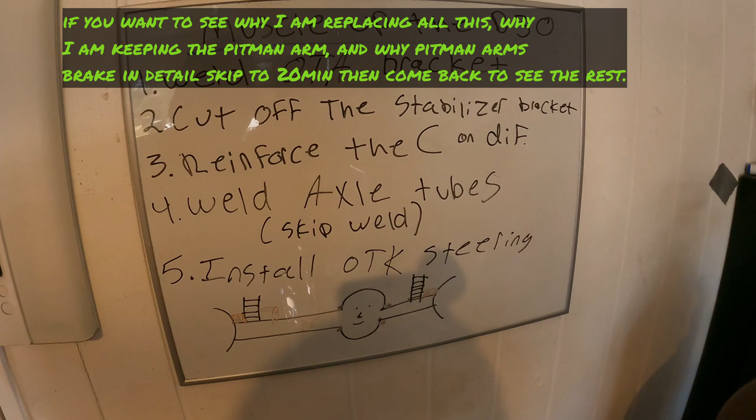So we are back after trail. We're back at the garage. So today is the day we're gonna do upgrades. We found out weak is our steering. So we're gonna call this, let me show you guys, we're gonna call this Muscle Up the Dana 30. So we're gonna be doing quite a bit to the front end, the steering and the diff.

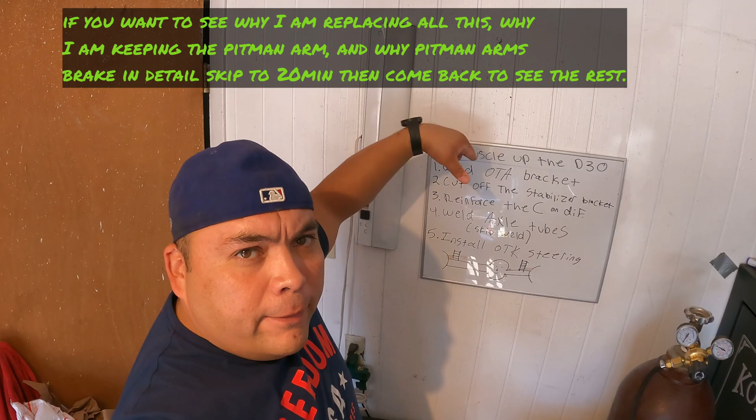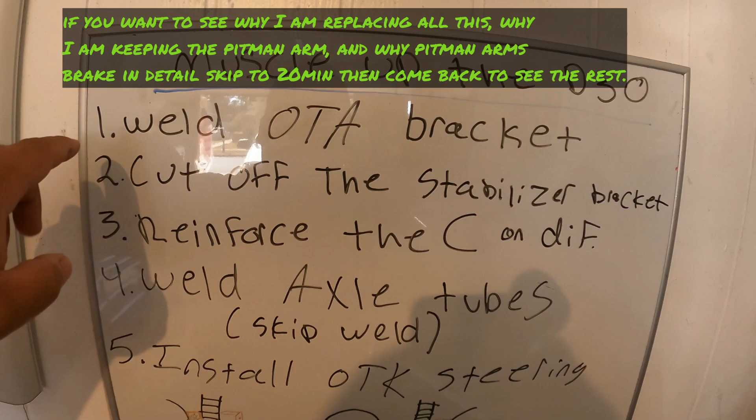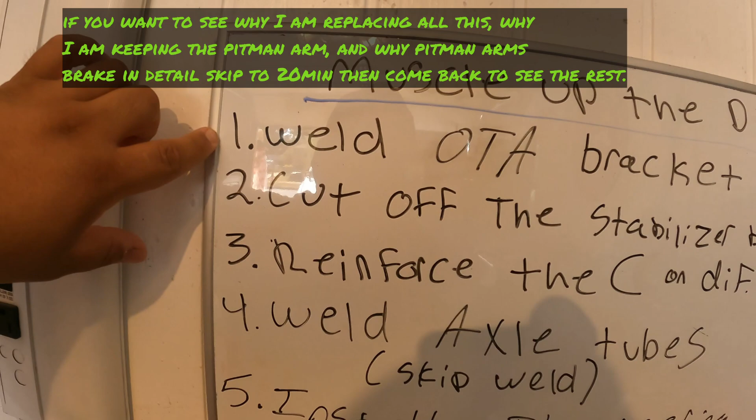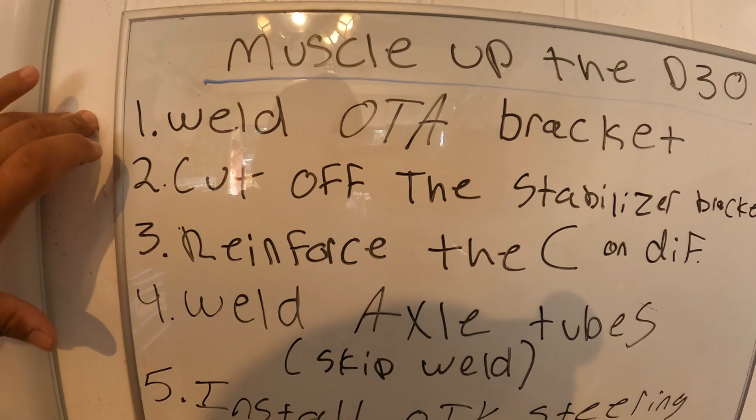So let's explain right here on my little board, my little checklist of what's gonna happen, and that way I could explain it a little better, so you guys could see. All right, so first things first, I'm gonna strip the whole steering, the whole front end of it, and we're gonna weld the over the axle bracket for our track bar. So we got that one's in. We're gonna cut off the steering stabilizer bracket because we're gonna relocate that or take it off, so probably relocate it, but you guys will see everything.

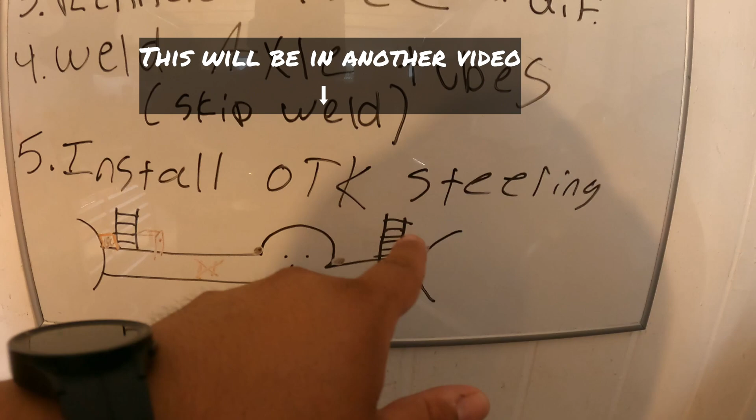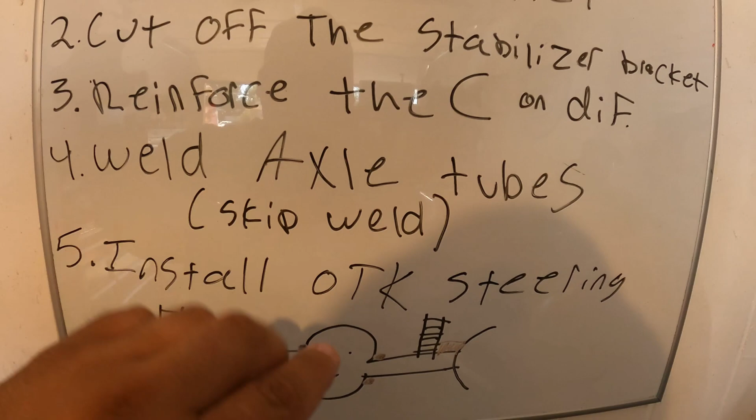We're gonna reinforce the C's on the diff, which, look at my picture, you like my differential picture? Which is this, I'll show you right now. And then we're also gonna weld the axle tubes to the carrier, or the cast. And I'm gonna preheat that. I'm gonna show you guys how I'm gonna do it.

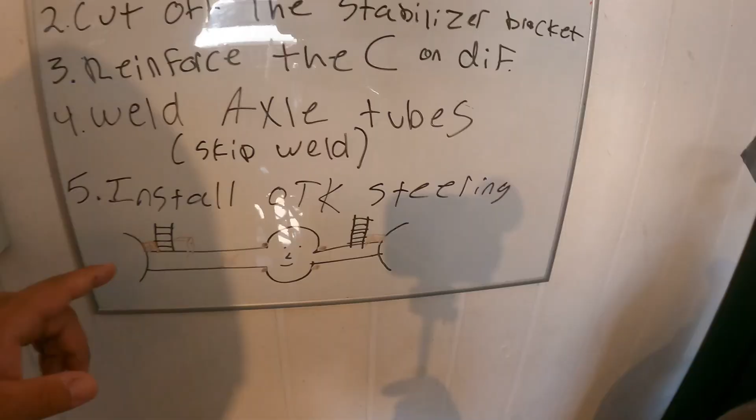I mean, remember, I'm not an expert. I'm just the guy that knows a little bit about a lot of things, not everything about one thing. So I'm gonna show you guys how I'm gonna weld it. Hopefully it should work. I've welded this type of material before. So we're gonna hit it. We're gonna weld it hot. We're gonna hit it good. And then we're gonna install the over the knuckle steering. The whole kit. I got the whole kit. So we're gonna be doing that, because you guys saw it, it broke.

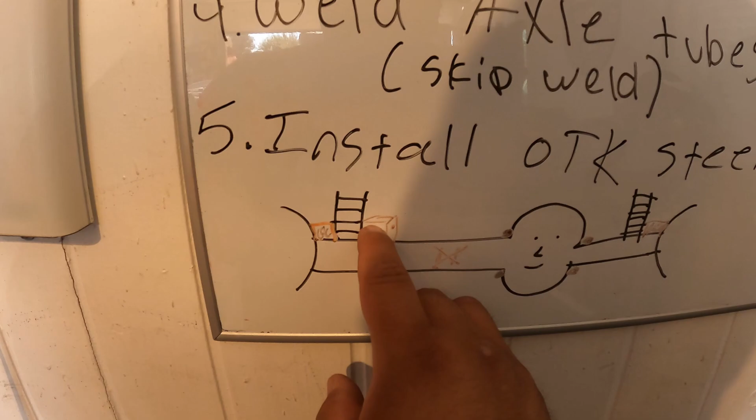Of course, we're gonna weld our new track bar bracket right here, which, check it out, I did pick it up from Trail Forge. This one's it. I got the 6-inch plus one for a 6-inch lift or more.

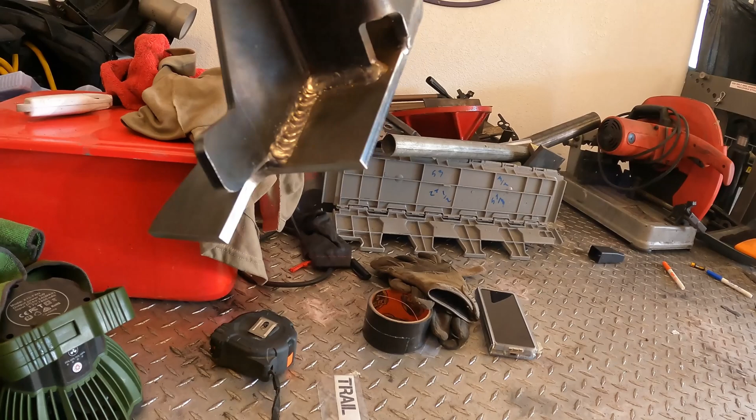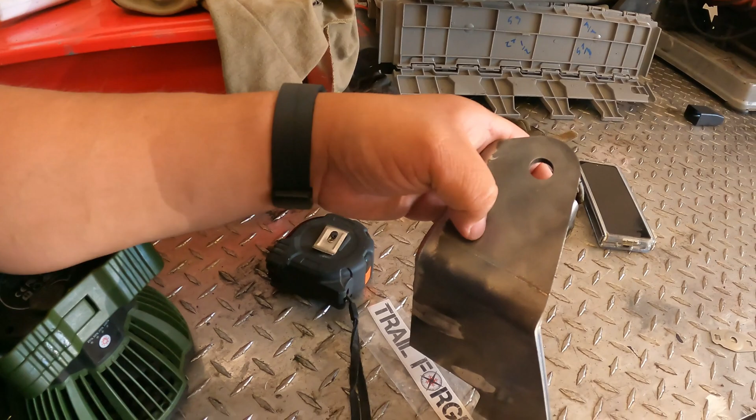So we're gonna weld this one, I'm gonna weld it super strong, because eventually, this is for another video, I'm thinking I'm gonna put some hydro assist on it. I already have it in my head. I already know where to get all the parts, and I'm gonna hopefully do it for a really low cost. But that's for another video. So this, I'm gonna have to weld it super strong. And I'll show you guys my welds.

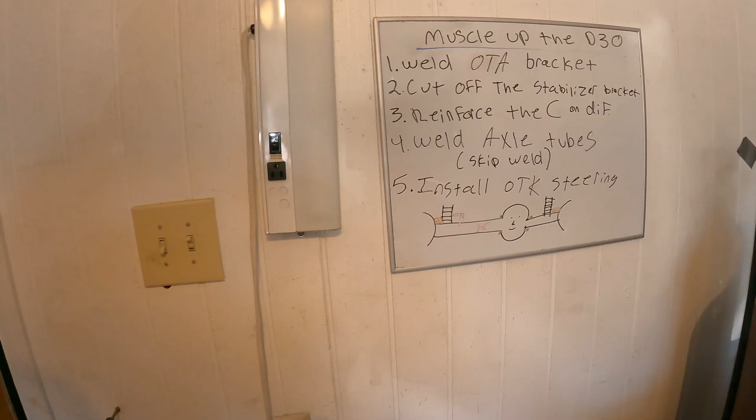So yeah, I like this bracket. They welded it pretty good. It comes pretty good from Trail Forge. So we're gonna be welding that today. So yeah, guys, this is our plan. So first things first, let me get this thing up in the air, start stripping the front end.

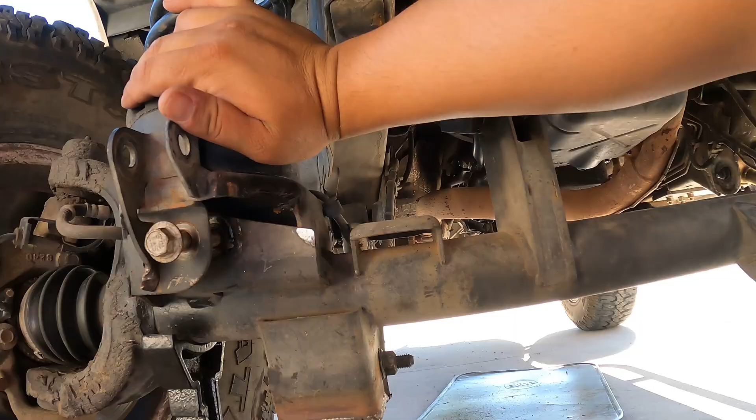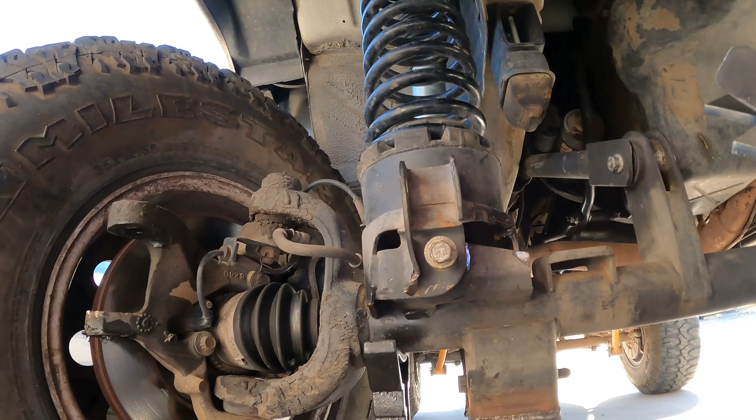A lot of people take the spring off before putting this bracket on, but what I'm gonna do, because this is what you want, I mean, it's really good fitment, but it needs a little bit better fitment, but it's all right, not a big issue. The only thing I'm gonna have to trim a little is this right here. Not a big issue. I like the bracket, not perfect, but close enough.

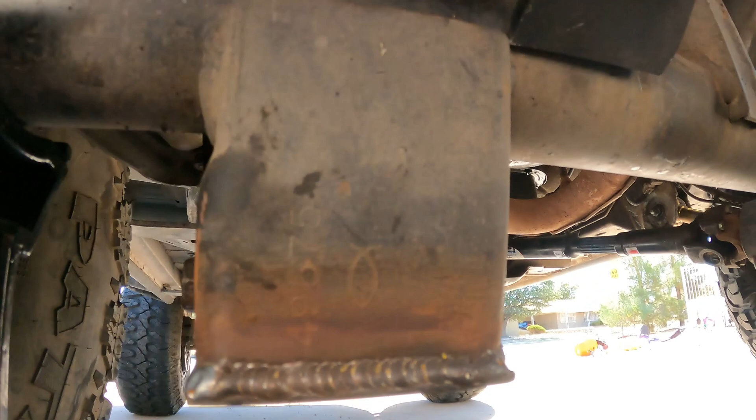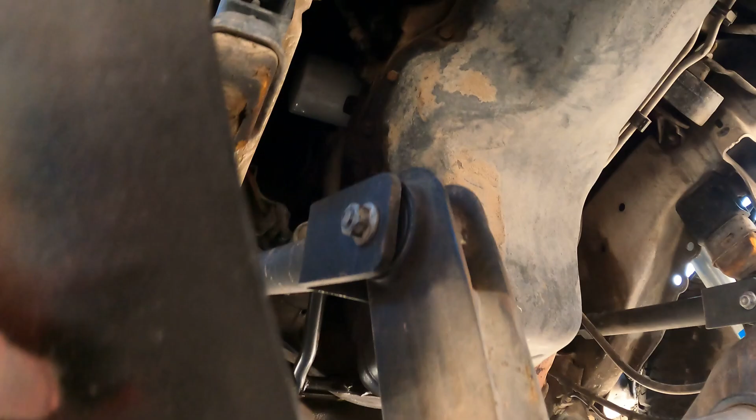Reason why I'm gonna do that, because what I've seen people, they leave a little gap between, because I could weld it right there, no problem, right? But there's a little bit of gaps, and when you're gonna weld something that you're gonna depend on a lot, you don't want gaps. You want it as close to perfect as possible, because check that out. So there's that gap there, right? And of course, I could just bolt it like that, close the gap up, and done.

I already checked if I could open or close that. No, that's not the issue. I could do it like that, but I leave gaps. Let me show. I don't know if you could see, there's gaps between metal and metal. You don't want gaps. You want it at least touching. See? And look, see up here, the bracket up here where my pinky's at.

I want that touching. I could fill it, but I don't want to. You want to get it as close to the metal as possible, because I'm gonna bevel this a little bit, that way I could really get some hardcore badass welds on it. But see over here, it's touching, right? So I got gaps. So I want to get it touching up there, where my pinky's at, and right here. But it's not touching over here, and I'm gonna weld it over here too.

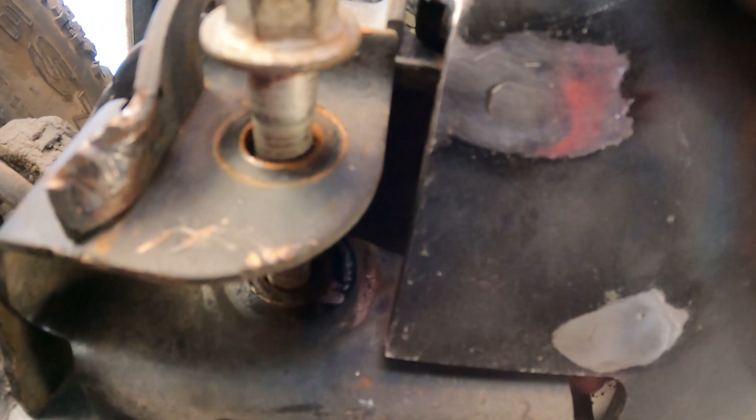So the reason it's not, it's an easy fix. It's right here. That's the issue. So I'm gonna grind that off a little bit, and then I'll bring you guys back once I got the final fix.

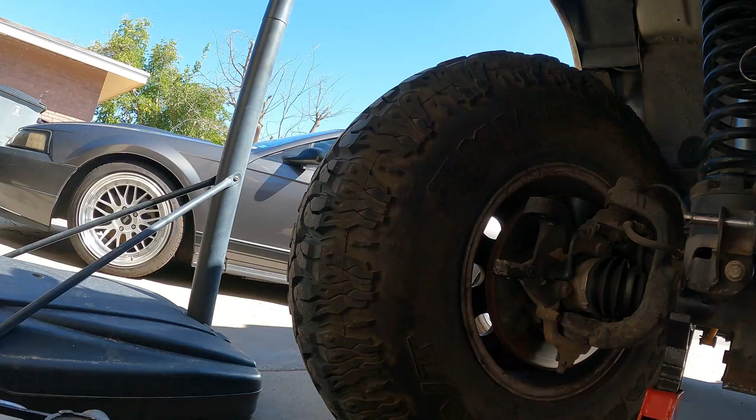All right, guys. So I got it fitted. I'm gonna take it off right now and show you what I grinded. But man, did I get it right on the money? Right on the money. No gaps. I'm gonna weld all this. No gaps down here. Check it out. Hopefully you guys can see it's touching the metal.

So we're gonna bevel this a tad, bevel this, and then we're gonna hit it. We're gonna weld it over here too. No gaps on that one. It's touching the spring, I think it's called perch. Yeah, sure, whatever, we'll call it that. So it's touching that, so that's gonna be welded all the way around. So yeah, guys, it was just very little that I had to grind.

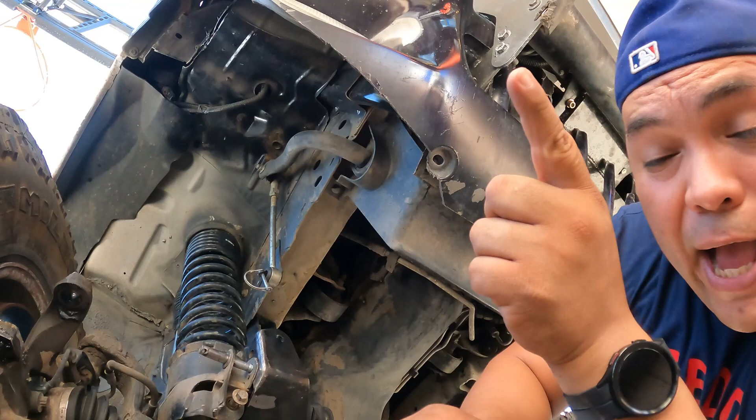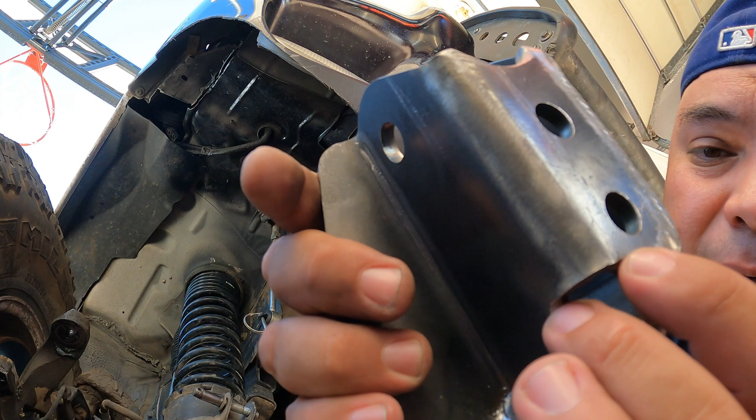Let me put the camera down so I can show you guys right quick. And it went on good. Check it out. They did an awesome job building it. But right there, you guys could see right there. Just put the grinding wheel right in there. Grinded a very little bit off of it. But man, the fitment is next to perfect. I love it. I love the way it's gonna fit.

Now fitment is key when you're welding. Fitment is key. If you don't got a good fitter, you're gonna have a hard time. But yeah, guys, so now I'm gonna just mark it with the marker, every spot I'm gonna hit with the weld, and clean it up. Bring you guys back out as soon as I tack it.

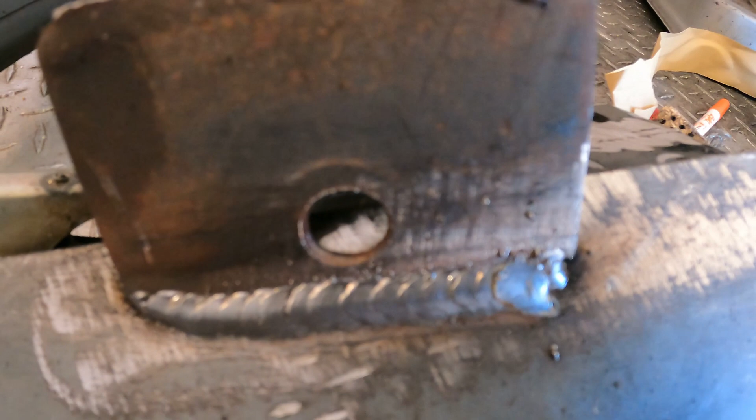All right guys, so we're ready to tack. I already prepped it. Prep work is key work. And I already changed my wire. Already threw a little practice bead. Check it out. Not too bad. Remember, always throw a practice bead, even if you're a pro, which I'm not. But look at that. Hopefully I could do the same thing over there.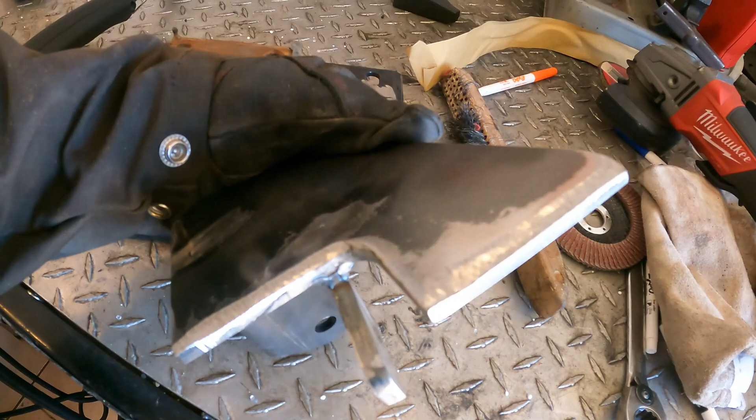So I already prepped this one as well, beveled it, prepped it all the way. So threw my practice bead. Time to super glue it to the Jeep. All right, guys, I got it tacked in. Those are just tacks. Tack there, tack there, tack there, tack back there, tack everywhere. So I like the fitment. Beautiful. Time to hit it.

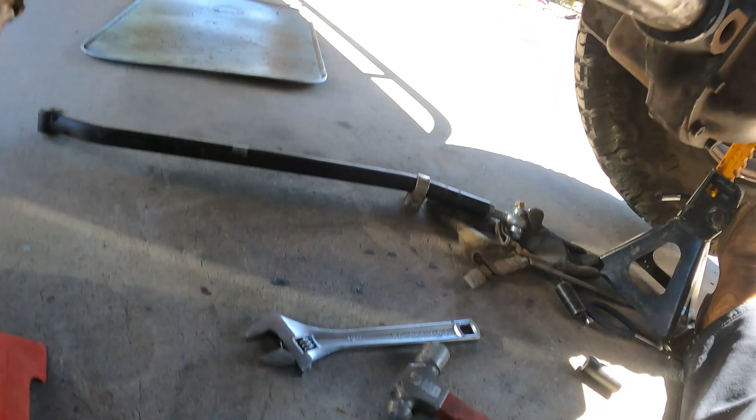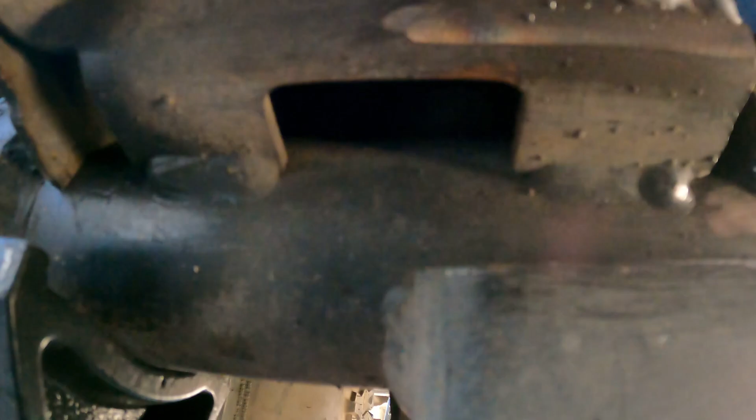All right, guys, check it out. All done. Check out the weld. Not to toot my own horn. All the way around here, guys. There. All the way in the bottom. Hidden in there. All the way around there, guys. So, oh, I'm gonna tack it right at the bottom. So yeah, guys, this thing ain't going anywhere. This thing is solidly mounted.

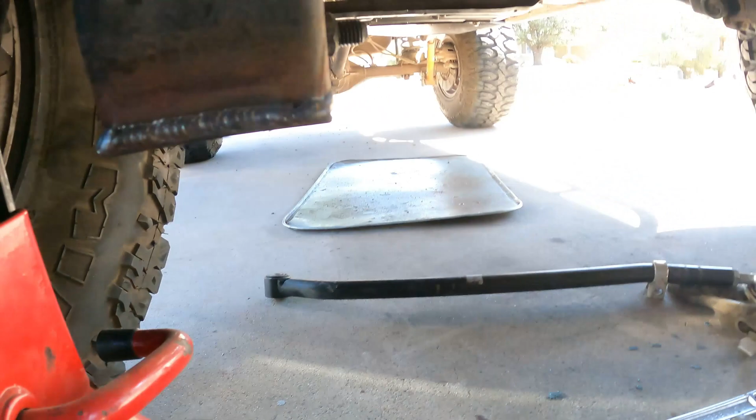And you always want to do your hammer test, just to make sure you super glued it really good. But yeah, guys, donezo. Not too bad, may I say so. So yeah, guys, I like it. So now the other part. So we're done with this bracket. It's mounted solid. This thing is not going anywhere anytime.

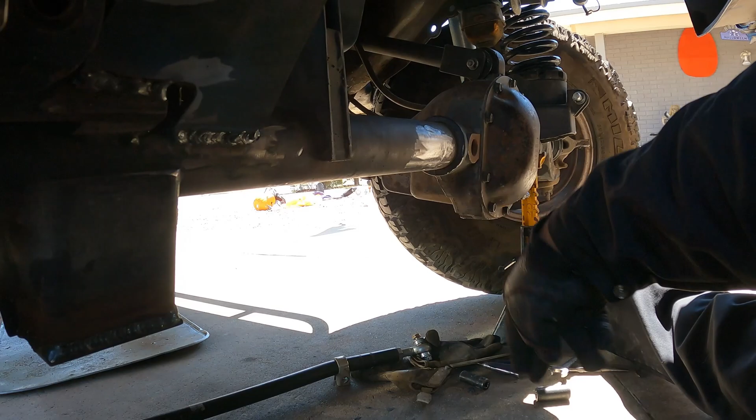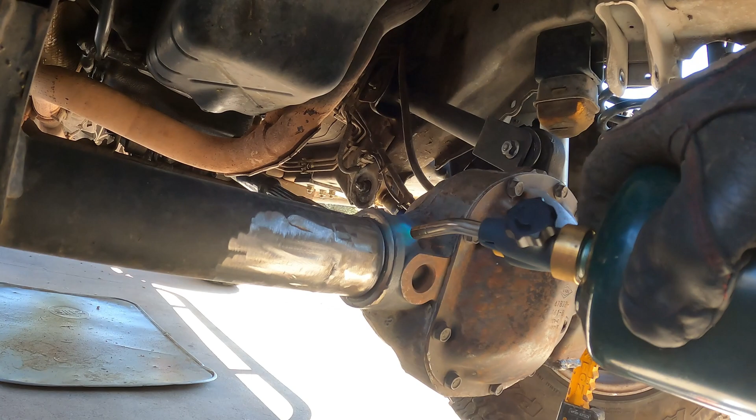So now my next venture, let me clean it all up and I'll bring you guys back out once it is welded. So that is the before. And I already cut off that steering stabilizer bracket. It's cut off. So now let's try the weld. So I'm gonna heat it up for a little bit, guys, and then I'm gonna weld it, and then I'll bring you guys back out, because I can't hold the camera. Oh man, my torch. Let me continue heating it.

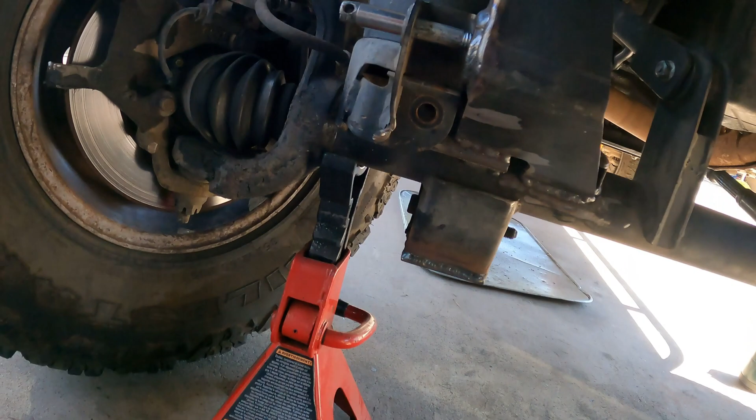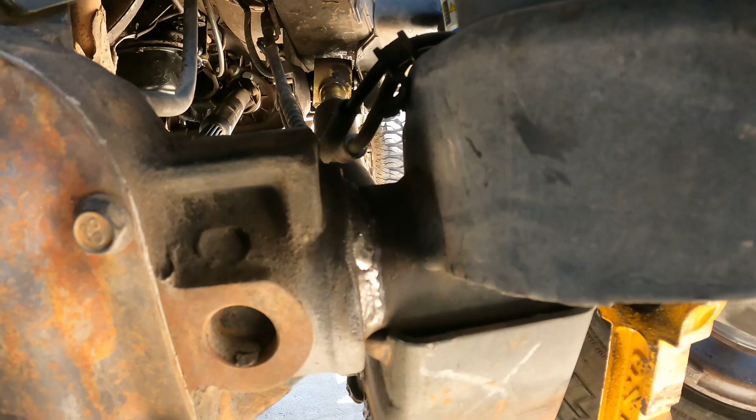All right, guys, not too bad. So we're done welding that. Also, I ended up doing the whole thing, not skip weld. The one I did skip welds on was this one, because I couldn't get to all of it because of the brackets. But I mean, doesn't look too bad. Hopefully it glued really good, let's put it that way. So yeah, guys, we're done with the welding. I know I still got to do some braces for this right here, but I don't know if I'm gonna get to it today.

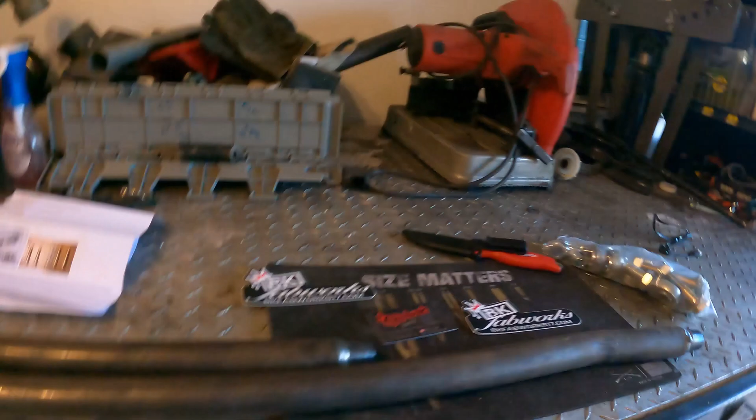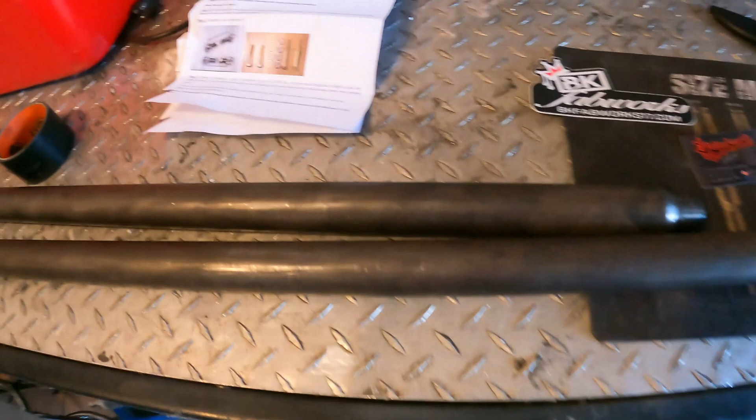Hey guys, so it's the next day. Like I showed you guys, all that is done. The parts finally showed up, so let me show you where I got them from. All right, so check it out. This is where I got them from. I know the bracket I got from Trail Forged. I was gonna go with Trail Forged, but then I found this company, BK Fabworks, and I did pay for the whole thing. This is what came in the box. I paid $269 plus shipping. It was $30 for shipping. So I like it.

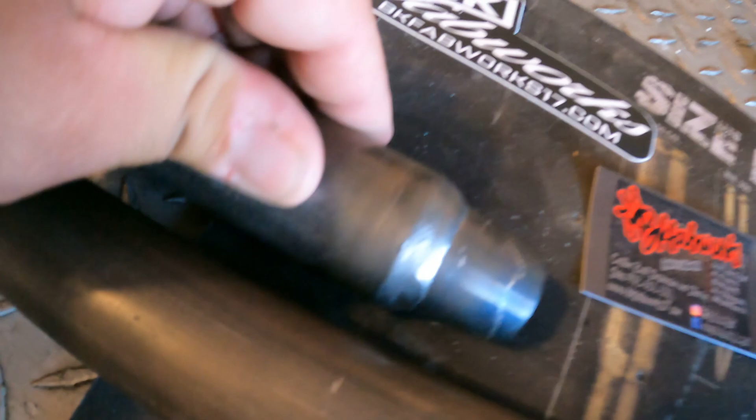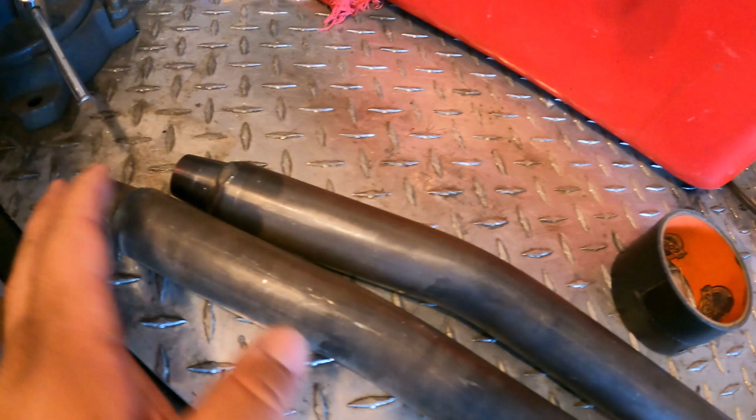I love the welds and all of it. I love all the welds they did on it. It is made in the USA, if you guys could see. So yeah, guys, it is super beefy, super strong. I love it, and it's pretty common sense how to install it. This is something somebody with no skills could do, but it comes with a set of instructions, what you need and all that stuff. I already have the drill bit.

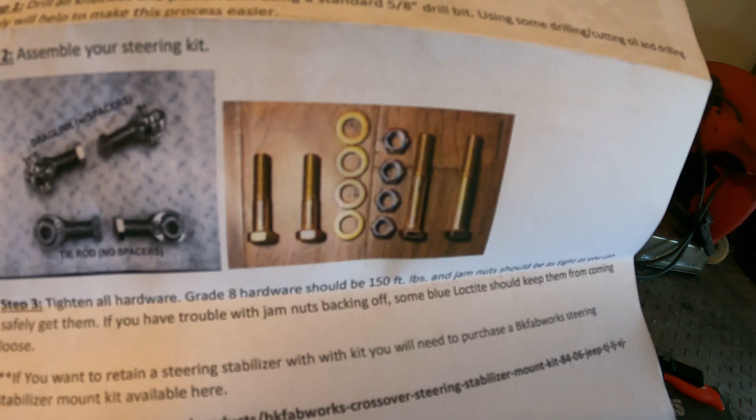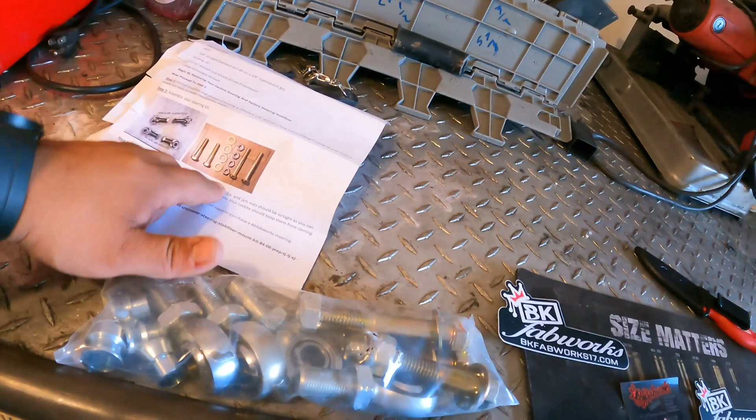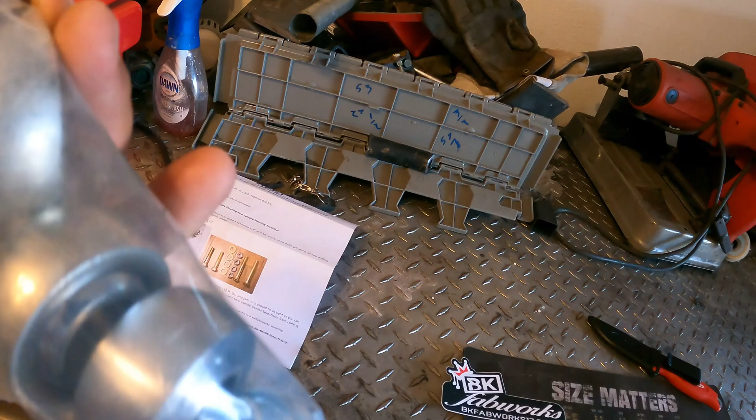The good thing, it shows you the torque specs. So 150 foot-pounds of torque. That's the only thing I'm going to use from the instructions, because like I said, it's pretty simple to install. It comes with all the hardware here, everything you need. I love this thing. It looks good, and it's super beefy. I could tell a big difference.

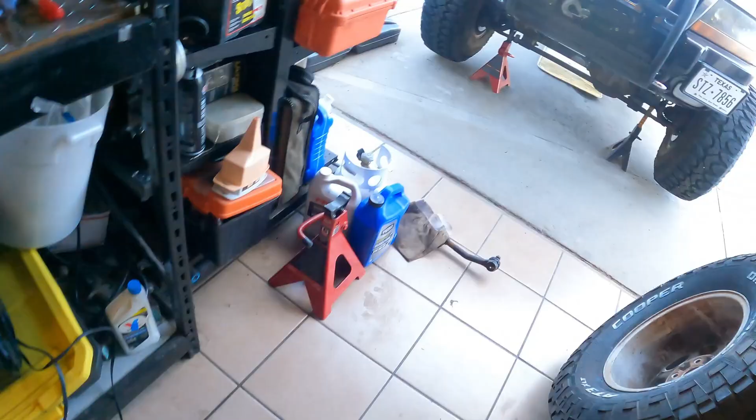Next thing I'm probably gonna break is probably the gearbox or the knuckles. That's the other bad thing, because you drill it out, so you do weaken the knuckles a little bit, but we'll see how long they hold. You guys will be witness if they hold or not. Right now I put the old one on because I'm going to show you what I'm going to do. That way I don't have to take it to the alignment shop. You guys can see bracket, track bar is on there. Track bar probably still going to have to adjust it a little bit.

And I'm still leaving the pitman arm drop, the Rough Country. I'll pull out and I'll show you why those break. It's not that they're just cheap material. There's a reason they break, and I'll show you because I got proof of why they break. I'll pull the tie rod ends and I'll show you why. But yeah, guys, bracket ready. Just gotta drill those. Let's get them drilled and let's get it installed.

Hello, Leo. He's playing with his little, well, my RC car.

But yeah, guys, so let's get to it. Let me paint them up, and then I'll bring the camera up once I start drilling. All right, guys, so drilling is the hardest part. Drilling the pitman is the hardest. I already got the pitman drilled. It was tough. That was the one that took me the longest to drill.

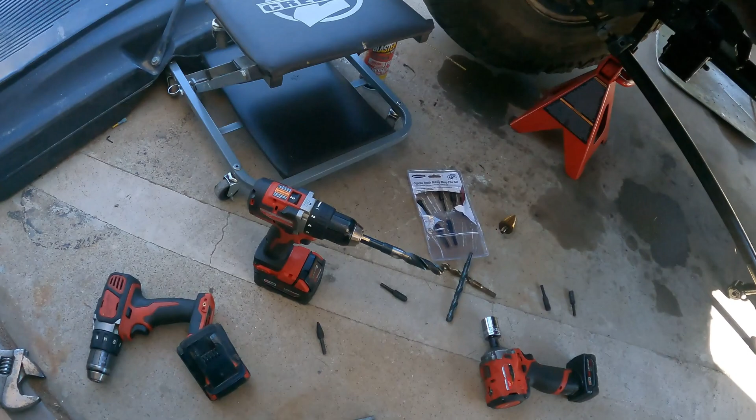And this is what I used. I bought the 5/8 bit, but I had these from Harbor Freight. These helped out, because I don't know why the pitman is so tough. I don't know if it's the material, but I used these from Harbor Freight to help me use the bit. But for the knuckle, 2 seconds to drill it with this bit. I hit it from the bottom, hit it from the top, easy.

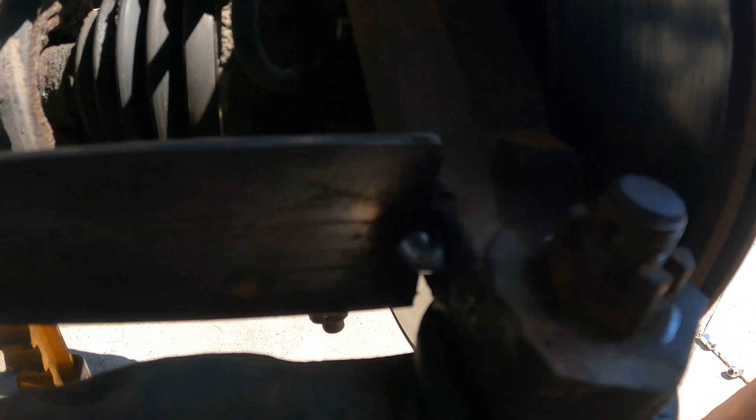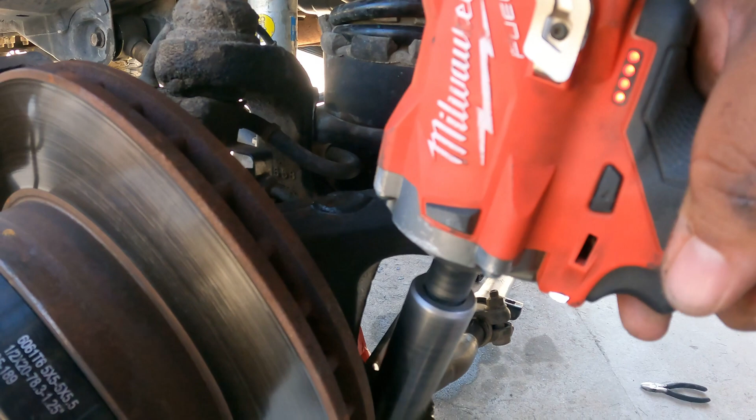Right now I'm gonna show you guys what I'm gonna do because I don't wanna get it aligned. All right, guys, so this is what I did. I just tacked that, nothing strong, just a slight tack. I cut it to size. I also took measurements, but now my toe should not be moving at all, as long as I don't break those welds. So now check it out. That's off. That's holding it right there, because I cut it right to the size, and our toe's the same.

So now time to drill the bottom ones. Look at that clean drill. I'm gonna drill the bottom ones, and then of course I'm gonna take measurements just to make sure. That's my little trick right there, so my toe don't move. Saves me 80 bucks on the alignment. So let me go ahead and drill, and then I'll bring it back up when it's time to assemble everything.

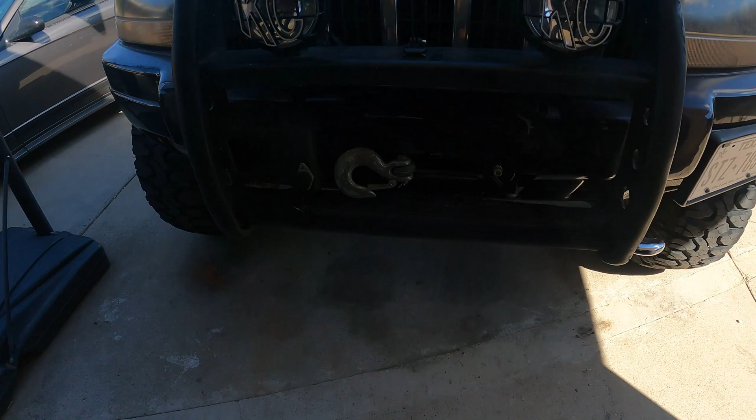All right, good tip. If you like to work outside of your house and you don't have a garage, make sure you keep it clean. That way your wife doesn't complain of you working outside. That's my tip.

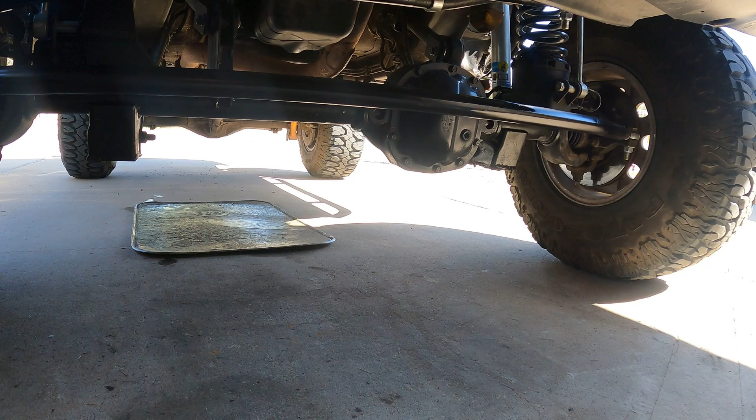All right, guys, check out our steering. Look at that. We hardly have an angle. I gotta get a little better at doing these videos. I wish I would have taken angle measurements of how steep our angles were on this one and on our track bar. Look at that track bar bracket. Everything looks good. We got plenty of clearance. The only thing now, I gotta figure out something because we're probably gonna hit that diff cover, but we'll leave that for another day. But guys, look at that. Plenty of room now. Plenty of clearance.

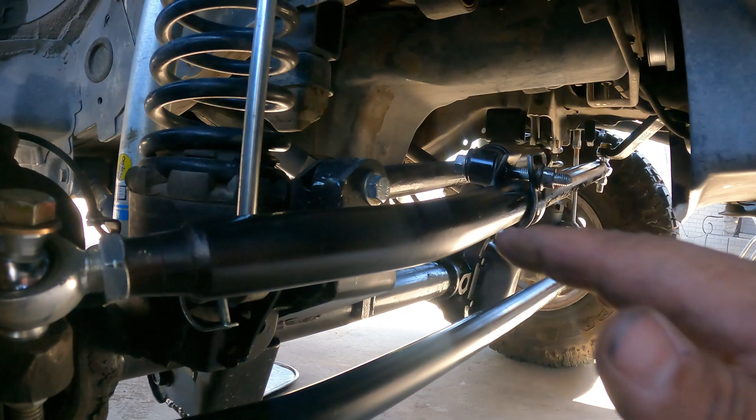All right, guys, so check it out. Look at those angles. Man, this is smooth. Look at our track bar bracket, right to where this one's at, man. This is awesome. This is awesome. And then, all right, so everything that got done.

So we installed this one, the tie rod, from our gearbox to the knuckle. We got this one from BK Fabworks, I believe. I paid $269, so I think it was a hell of a deal. Awesome, look at that, love it. The fitment was perfect. I like the angles of the bends on the tubes. They're not excessive. They're awesome. I like the fitment, the instructions, because I mean, it's common sense how to do this.

The only thing that I use in the instructions is how much you're supposed to torque these. So these get torqued to 150 foot-pounds. That's a lot. I wouldn't have thought to torque them that tight, but yeah, all of them got torqued to 150 foot-pounds. You guys can see they provided all the hardware. Nothing did I need to buy.

Nothing. The only thing, of course, we cut off the steering stabilizer bracket from the diff because it was going to be hanging way down here. So we cut it off. We're not going to be using that steering stabilizer. We're sticking to this one. Look at the angle of this one. This one's straight, solid. So we're using this one.

I made this bracket out of that 3/16 plate that I have. We already drove it. It drove good before, but now it drives better. Reason is I feel less tension, less stress on the steering, because look at our angles, guys. Our angles are almost flat, which is great for when our diff articulates up and down. It won't be moving our diffs up and sideways. It should be just going straight up and down.

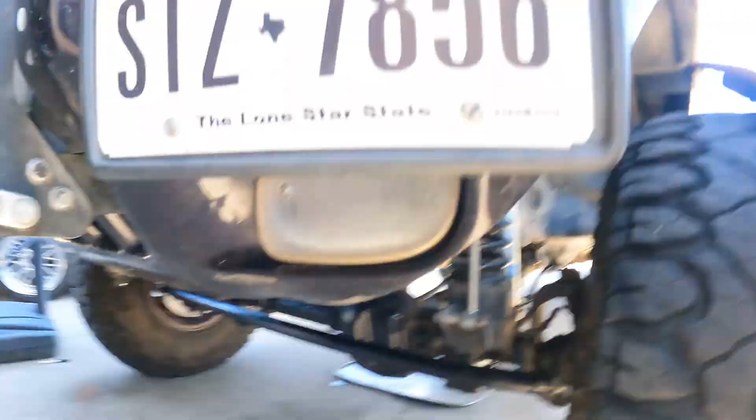But check it out, guys. That's our pitman arm, and yes, I am using the pitman drop from Rough Country. And I'll show you guys why everybody complains about them. I got proof, of course. On this channel, I'm gonna prove everything I do, that this is good stuff or bad stuff, because we're gonna go test it. This is not for show. This is all gonna hit the trails.

Next video is gonna be a good one. We're gonna try something new. But yeah, guys, everything here is gonna get tested. It's not like, oh, you should buy it. No, we're gonna test it. If it breaks, it breaks. If it don't break, it don't break.

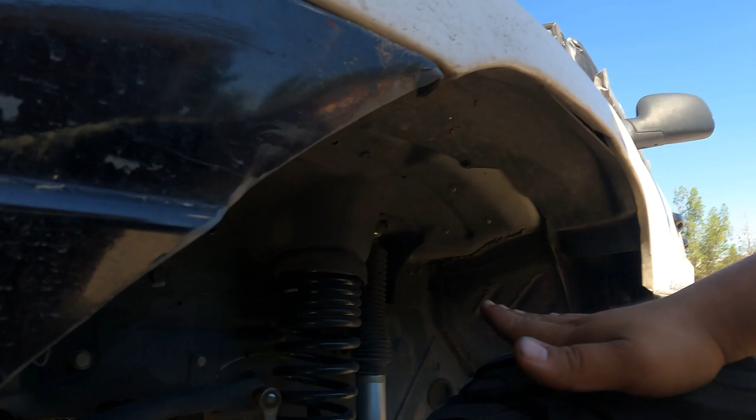But I'll show you guys why I'm keeping that pitman arm. Because it drops it, look at that angle. It's a beautiful angle, not a steep angle. So I got a lot of room for articulation now, but I don't think I have the clearance here to take full advantage of it. Eventually we'll figure something out about these wheels. There's gonna be a lot less stress everywhere now. I could feel it just by driving.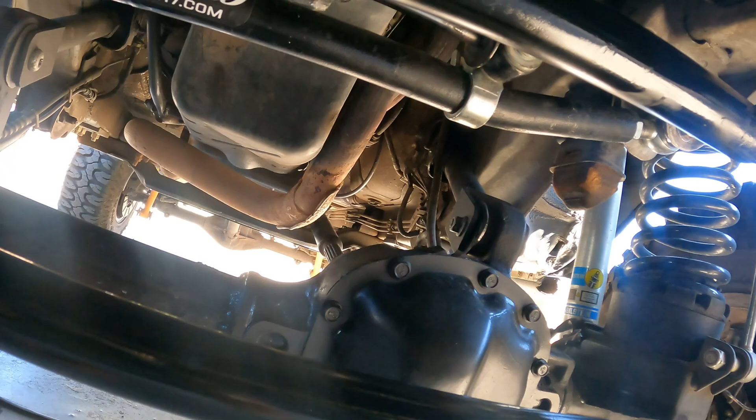So yeah, guys, awesome. Now let's go show you why I did all this. It's not just buy it for show. I'm gonna show you that Rough Country pitman arm hasn't broken on me. I think it should have broken already, but I think something else broke to prevent that. Let's show you guys.

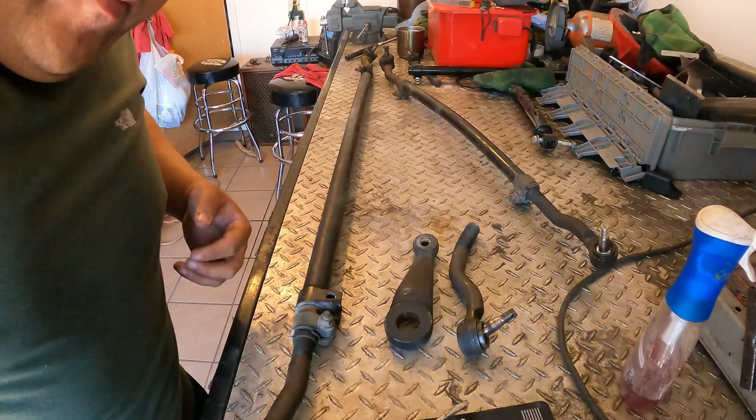All right, guys, so I got this set up. I'm gonna show you why I'm keeping that pitman arm and why they fail. So this is our original steering linkage, right? This one, you guys can see, is the one I bent the first time.

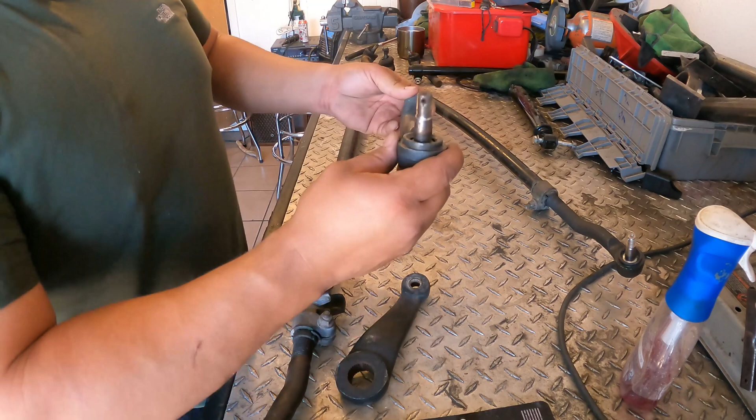And when I was running this one, I did run it partially with the original pitman arm, and then I did run it with the Rough Country pitman arm. But what nobody tells you, if you take off this boot, this is why things break. Check that out. So this goes like this, right? So due to the angle, the lift that I had, this would pivot down.

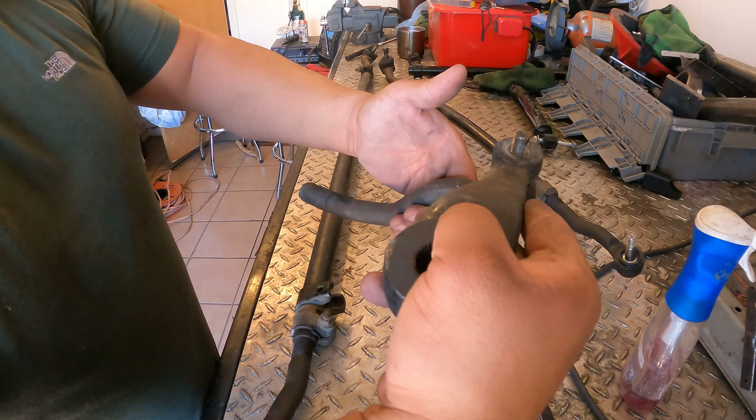And check this out. Look how it bent. That's pretty strong. It bent this actual tie rod. It bent it over here. That's because of the articulation we have, that this goes down. So that would hit right there. And of course, it would get to a point where the tension here would be so strong, that's why they snap pitman arms. So I mean, I wouldn't have seen this if my boot wouldn't have torn.

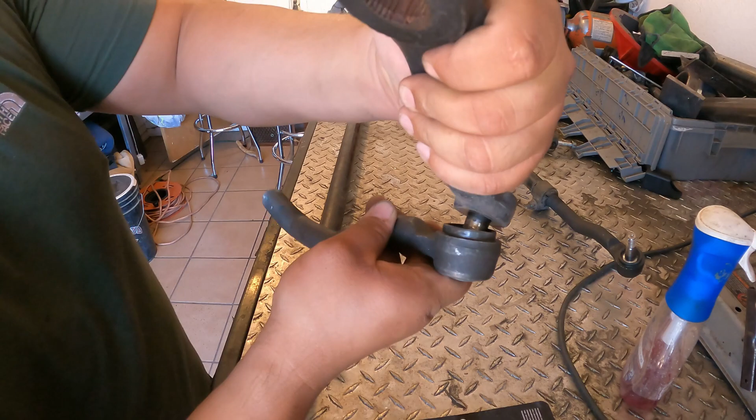I'm like, oh, let me just take it off. And that's where I see that. You could see it right there where this was riding. There you go. This is how it goes. So you could see when I would flex, this would pivot down and it would bind right there. So imagine the weight of the differential on this. That's a lot of weight.

That's why things fail. That's why these pitman arms fail, especially if you get the Rough Country one. Not because they suck, it's because of course they are longer. So the longer it is, the less strength you get. So you might be thinking, oh, you got that just because you were running the original one. Well, guess what? This one we just replaced, and that's the one that broke, so now I got plenty of spare parts that I can't use.

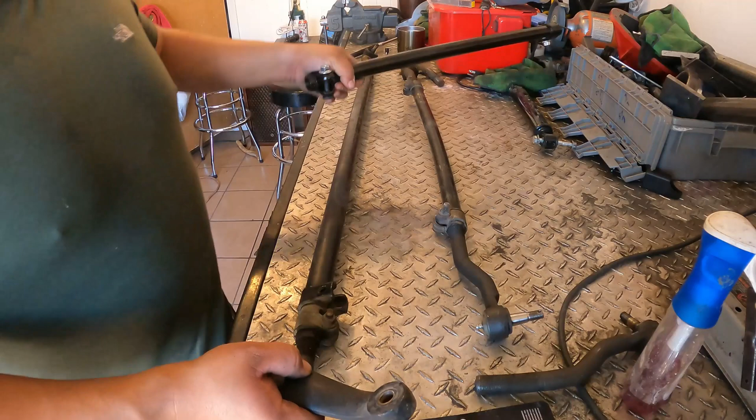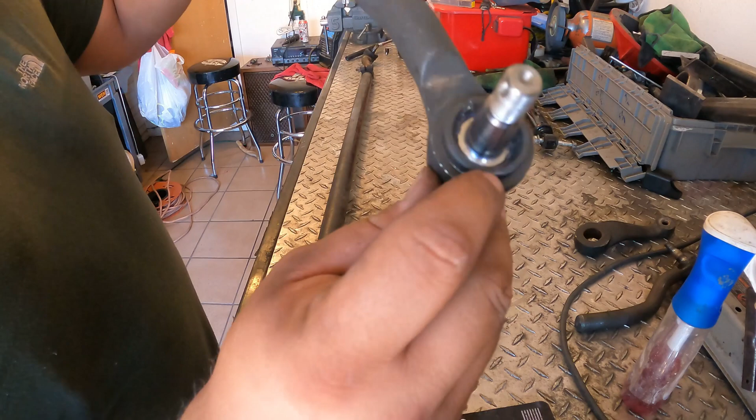But check this out. So I was like, maybe it was because I used the original one that caused that. But no, right now I have that drop pitman arm, and this one was brand new. And look, it's not as excessive. Hopefully you guys could really see. But you could see, even with the drop pitman arm, it was still binding. So eventually, if I continued riding with it, because it is longer, it would have snapped that Rough Country pitman arm.

And that's why a lot of people say Rough Country pitman arms, I mean, other parts of Rough Country, yeah, they do suck. But their pitman arms, people say they suck, take them off. No, it's not that they suck. It's that you're not paying attention to this binding piece right there. That's why they break. It's longer, so it's going to be weaker, obviously, when it comes to binding like that.

So you guys could see it right there. This one was my brand new one. I think this is only hitting two or three trails. That caused that little bend right there. Hopefully you guys could see it. So that's only with two trails. Imagine if I go on hard trails every weekend, I would have broken it. Three more trails, either this would have broken, or I'm pretty sure that pitman arm would have broken.

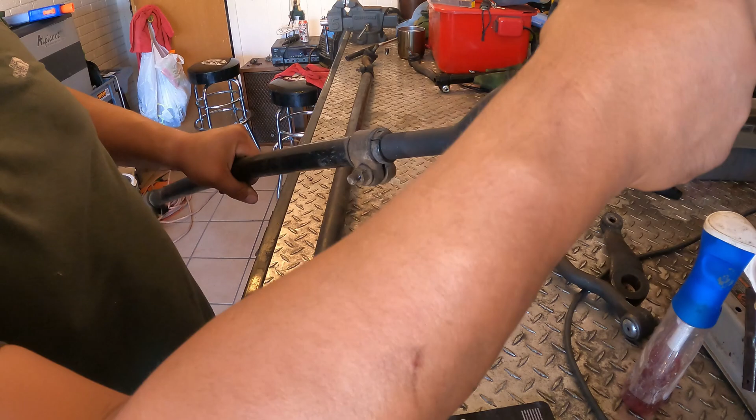And I wasn't gonna take this one off. The boot was torn, so I'm like, pretty sure the same thing happened that happened to this one. This one's excessive, this one is happening, but imagine, this drops, so the whole weight of the differential on one side is leaning on this. The whole diff, when it pivots down, it's leaning on this, so something's gonna give.

I'm pretty sure that's why my other one snapped here, it was a weaker, cheap material like this one. So the diff went down, the pitman held, this held, and that was our next weakest point. So that's why it snapped there. So see guys, there's a reason for everything.

So now, would I recommend everybody do this upgrade? No, because this steering is good steering. It's strong. The WJ steering, if you see an XJ, TJ, their steering is very thin. So this is good steering. But that good steering, if you only have a small lift, maybe 4 inches of lift, 33s, I would roll with this with 33s.

And if you don't hit hard trails, if you just go camping, mild trails on the weekend, this is good. I'm not gonna lie, guys. I'm not gonna try to tell you, oh, you have to upgrade. No, this is good steering. For mild, beginner, camping, this is good steering. It's good enough.

But now if you're gonna hit the rocks, you're gonna make your diff articulate, you're gonna be flexing, yes, then you guys saw it. I can't just tell you, yes, you need it. You guys have seen it. I've broken this twice. This one bent, you guys could see, and then my second one snapped. So I proved it to you guys. That is the weakest link in the front end. So now with the setup we have, I can't wait to go test it out, prove it to you guys, show you guys how it works, and all that good stuff.

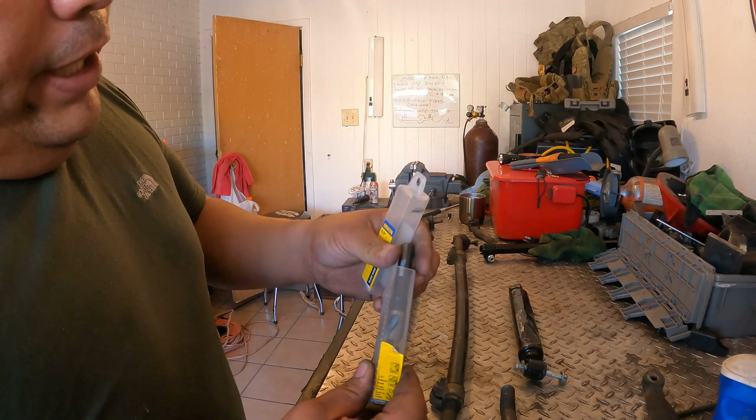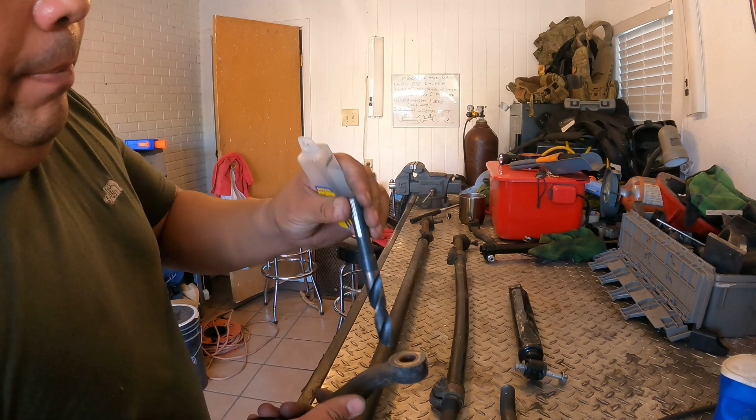Oh, and the drill bit. Sorry, guys. Let me show you the drill bit I used. I only used one drill bit. This is the bit I used. It's a 5/8 bit, and it's still good because I'm gonna use it to drill this one out to carry it as a spare. So, tip, use plenty of oil when you're drilling, and drill your pitman arm first. Pitman arm first, knuckles drill like this, quick and easy. So, do yourself a favor, drill your pitman arm first, then worry about everything else. And just keep it oiled. And I'm still gonna save this one because it's still good. You'll just need one bit.

That's all I needed. I didn't have to buy the other thing that they sold. I don't remember what it's called. I went with this one. Got it at Ace Hardware. Did the whole job, all 4 holes with it. Plenty of oil. I used plenty of batteries. Oh, other thing I also used, I had these. I didn't buy them on purpose. I had these to help me out because drilling this sucker, I don't know why it's so damn tough. When I got with the bit, I got halfway there, and then to help it out, I used this to grind it so it could be a little bit easier.

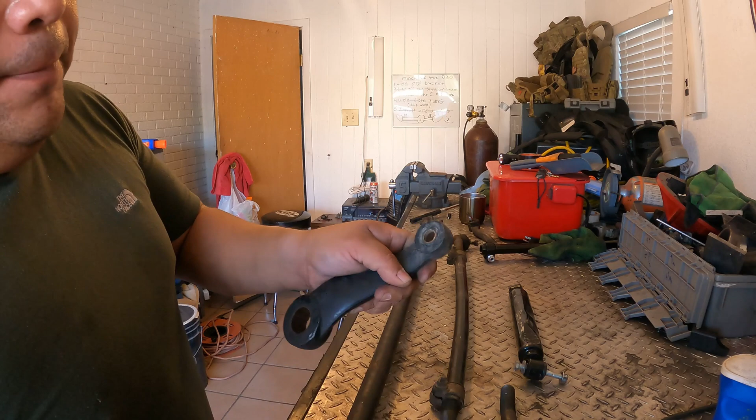So you don't need them. I'm pretty sure the bit would have done it. It would just take me longer. But yeah, I used these. Got them at Harbor Freight. Snap-on Freight, that's what we call it at the shop. So that's what I used, and got everything done. Ready to hit the trail, guys.